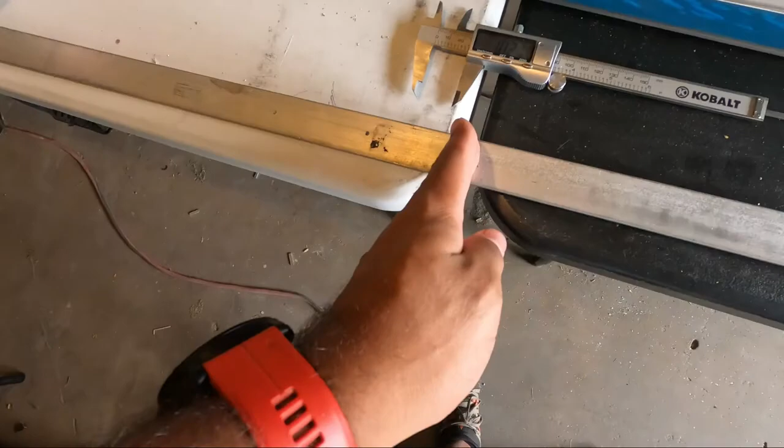The game plan for today is to use the extra spar cap strip where I messed up the drilling locations. I'm gonna cut it right here and use this portion as a rivet hole guide. Per the plans, rivets are 1.021 inches apart, so that's gonna look something like that down the whole length.

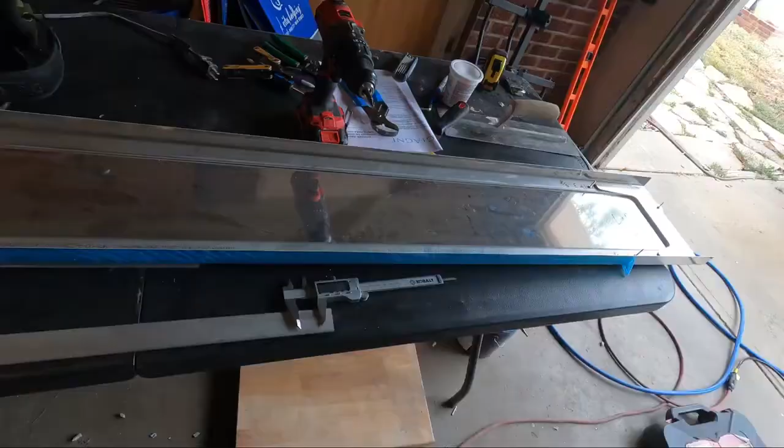So I'm gonna mark those, drill them, then start marking where they are on the actual spar, center punching, and drilling. I need to make sure not to drill the aileron and flap hinge locations per the plans. First things first is to mark all the rivet locations, so I'm gonna measure the center point of the cap strip.

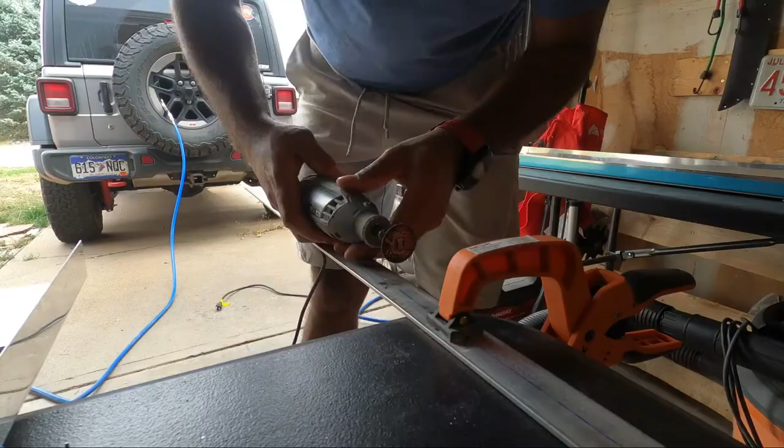I'm gonna cut off the excess right here, and I might find a use for this later down the line. Center punch, drill, and we'll see if everything lines up with this attachment and the center point over there.

Okay, I'm gonna drill 1/8 inch holes along this guide that I made. The final plans call for the holes that will have to get drilled eventually into the spar cap and spar web to be number 21 size holes, which is a number 21 drill bit, coming out to 0.1590 inches. So I'll have to go get some of those before I do the final drills, but I can start with 1/8 and resize to the larger size when I'm ready.

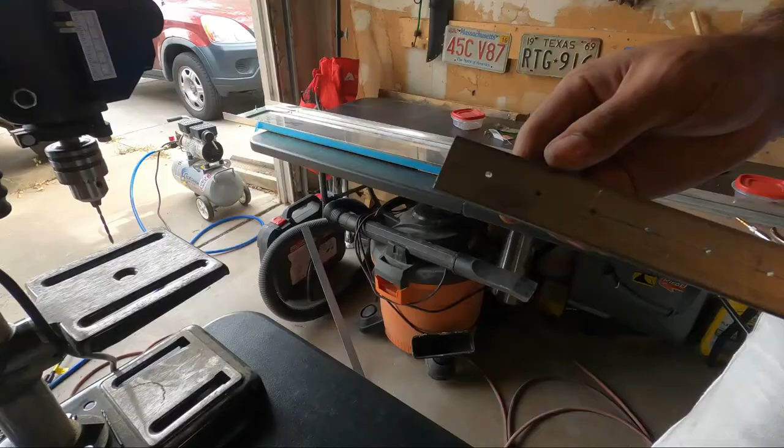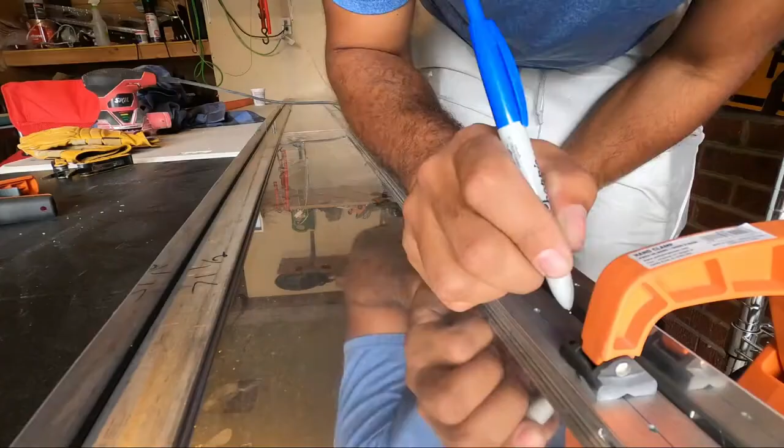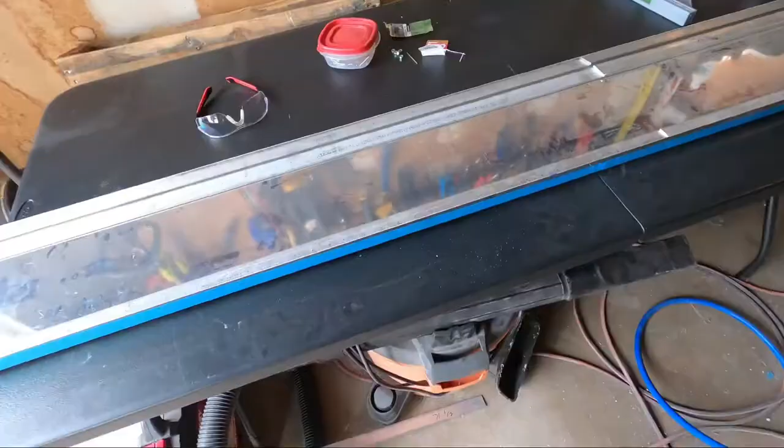Guide is made, let's see if it lines up. So I went ahead and marked all the rivet locations off camera because it's a little boring. Okay, station A flap, station B flap, station C flap, station D aileron, and station E aileron. Same thing on the left wing.

Hold the camera straight. I broke down and bought myself a rivet fan. So let's see if I can do this one-handed.

So this is 20 holes, and it can evenly space out all the holes I need to make, at least 20 at a time. Right now it's in its lowest, most compressed form. This is 3/4 inch spacing, this is 1 inch spacing, 1 1/4, and 1 1/2.

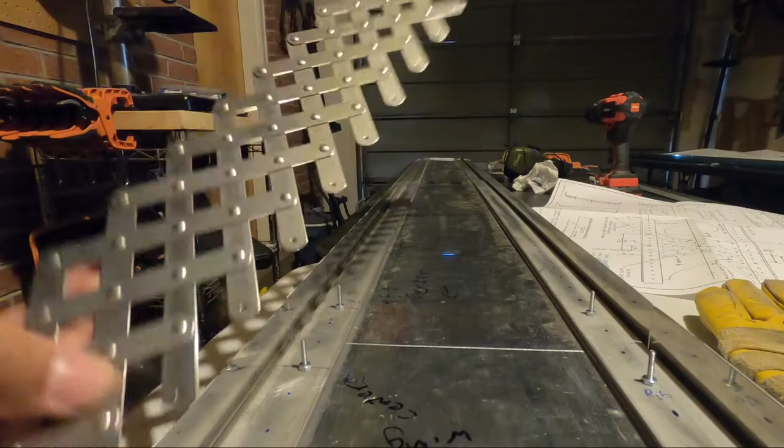So I'm gonna redo all these markings with this, which means I have to get rid of the original markings. I'm just gonna use a really fine sandpaper to do so. Then I'll mark them again, and we'll be ready to start center punching and drilling.

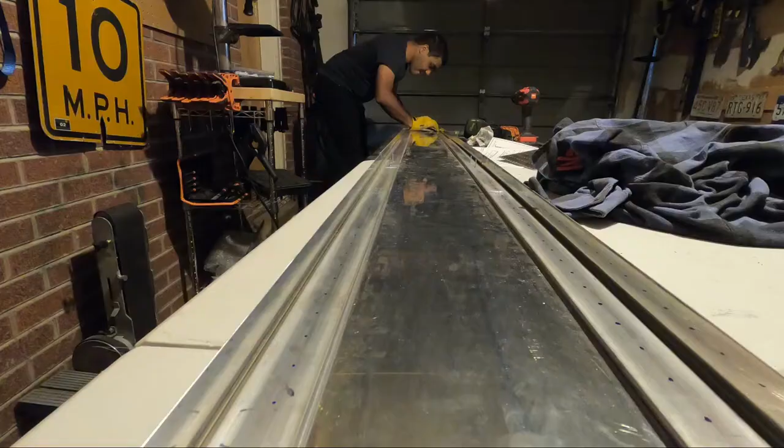In order to get the spacing for my spar correct, I'm using the full-size plans 7B. I'm going to line up these holes with that spacing.

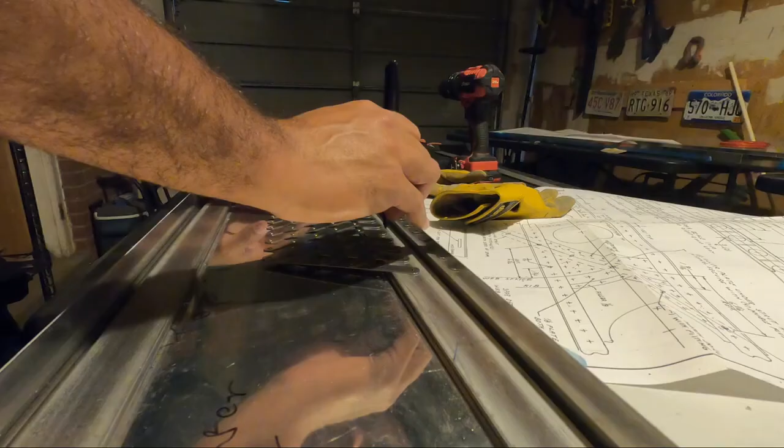Oh my goodness, so much better. So much better. They line up vertically. At the stations, they line up. That's huge. Now for the next swing.

Boom, marked, and this time it's actually accurate. Alright, start drilling. Drilling, I'm hungry. I'm gonna start drilling on Wednesday.

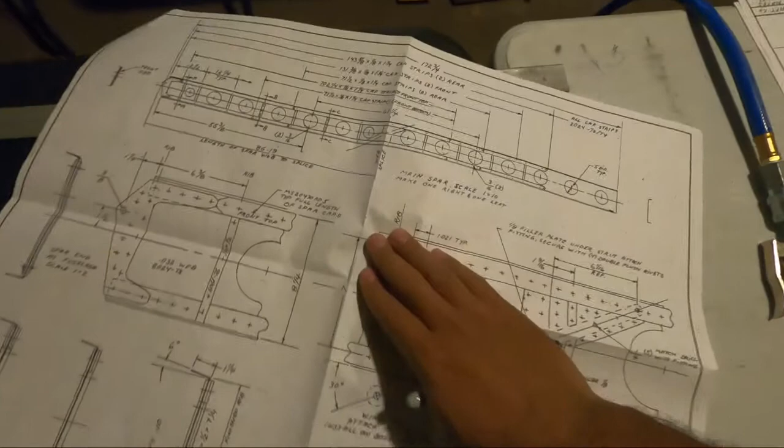Before we get started on drilling the rivet locations, I'm going to mark, or at least attempt to mark, where the ribs are supposed to go. It's a little difficult to make out from the plans. Let's see if I zoom in. These are spacers, right? It doesn't call out the ribs, unless those are the ribs.

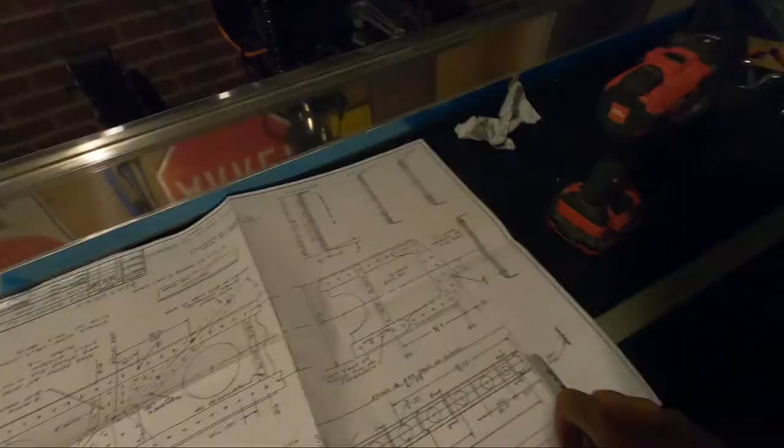1, 2, 3, 4, 5, 6, 7, 8, 9, 10, 11, 12, 13, 14, 15, 16. Okay, it's pretty much every space.

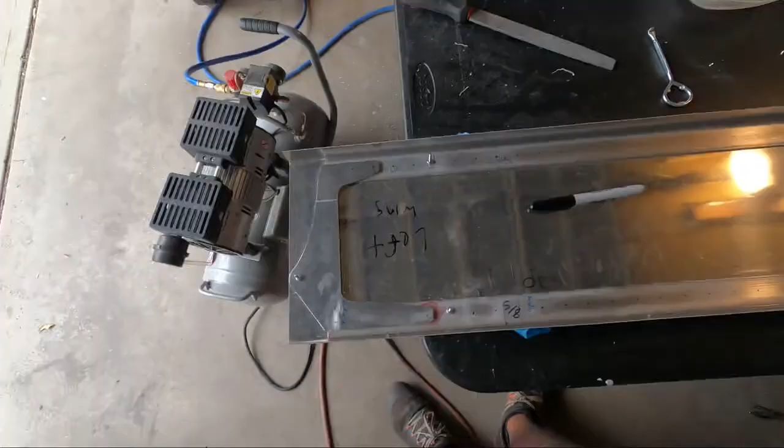Well, that was my epiphany on camera. Everywhere there's pretty much a spacer, there is a nose rib. I'll mark it. All right, rib, I'll mark a rib here. 0.032.

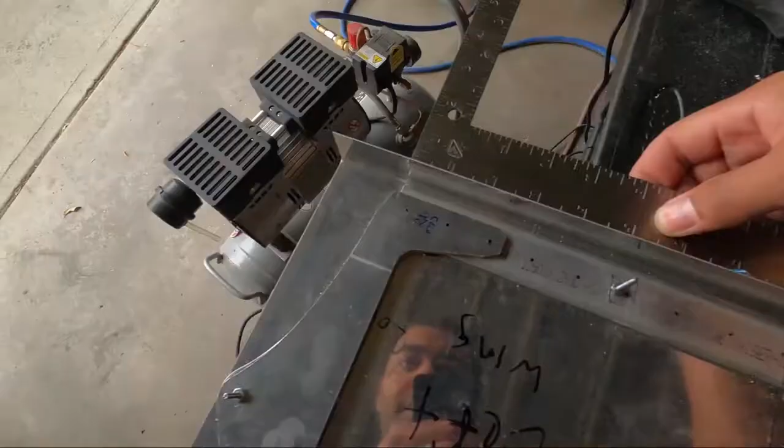Let's see. Rib. Rib.

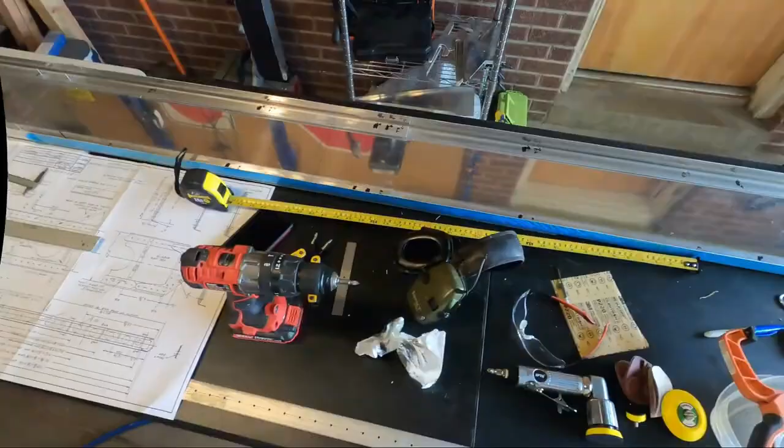Messed up measuring 3 times. I don't know why. I thought plans call for 12 1/4 inches between the ribs, starting after the third rib. So 1, 2, 3, and then 12 1/4. For some reason I measured it wrong, but it's all even now, it all lines up.

Rib locations. We're gonna center punch and drill. But first I need to feed my dog. This time we're gonna start on the right wing, because I did my first things on the left wing.

Center punch just broke, the C-clip on here just broke off. So alright, we're gonna have to pause on the center punching because my handheld center punches aren't really working, and that is what's left of the auto punch.

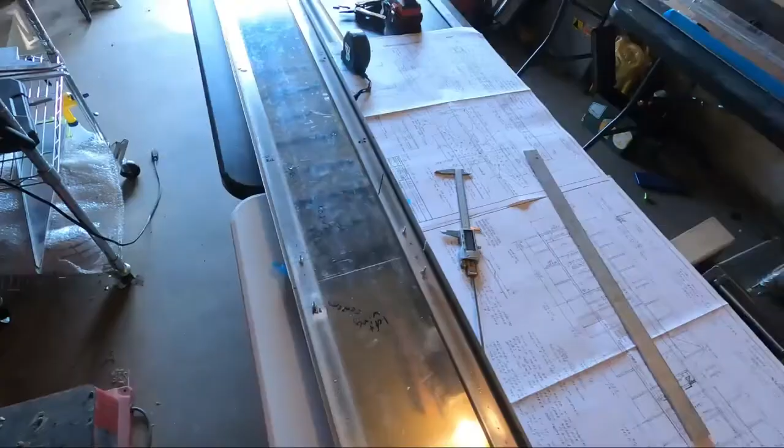Cap strip holes have been center punched. Let's check the plan, see what's next.

Now it's time to drill 1/8 inch holes for the cap strips. I'm going to level this up on top of the table so that it's in line with my drill press, and I'll start sliding it along as I get through each hole.

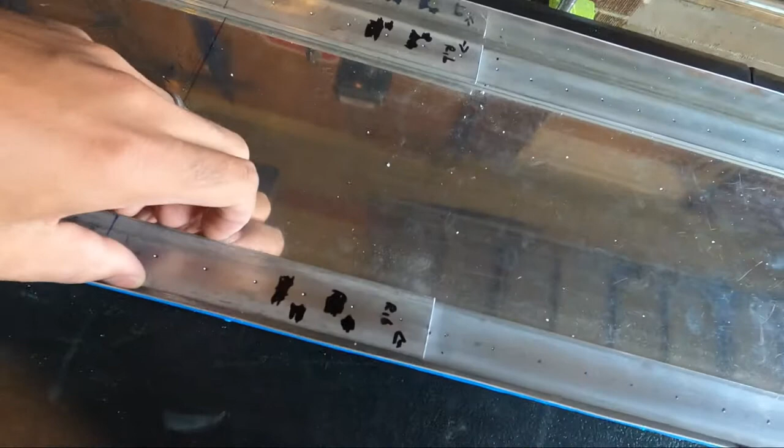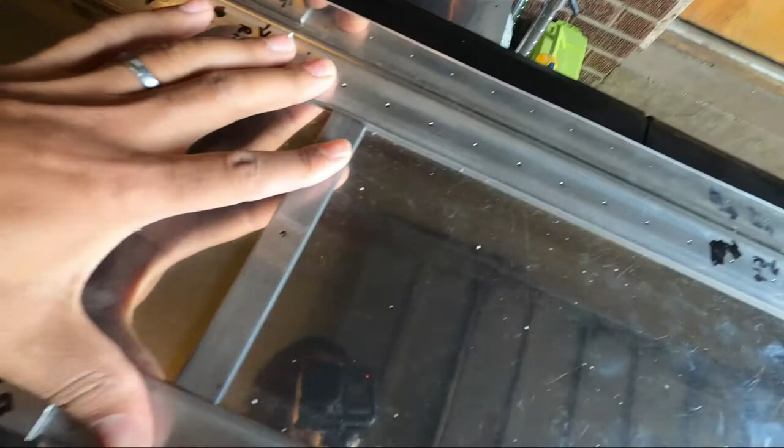I'm also going to clamp these in place. There's a little bit of wiggle room right here, so I need to make sure that the gap is consistent between the two. This is my guide, and we'll make sure that it's evenly spaced along the center line.

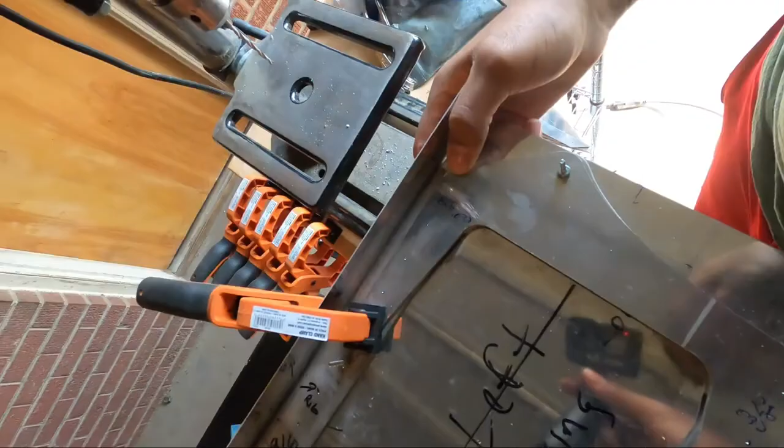First hole, boom. I'm gonna secure these areas with more of these nuts, because the clecos aren't long enough for that amount of metal, going through almost 3/4 of an inch of aluminum. Clecos aren't gonna cut it.

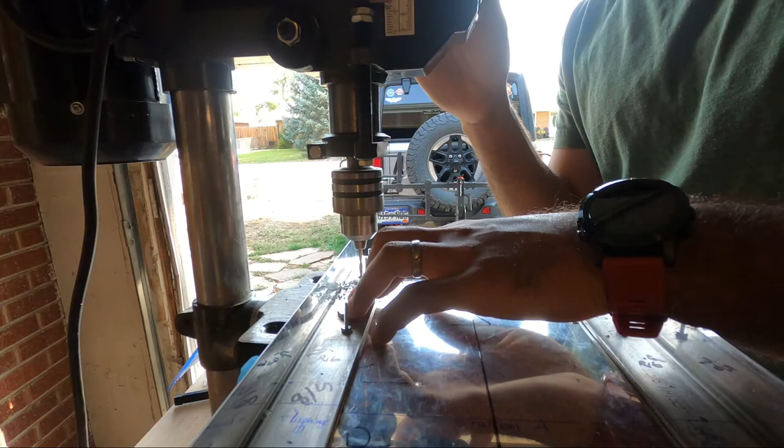Before I do any more, I'm going to do some center spots and clamp everything together.

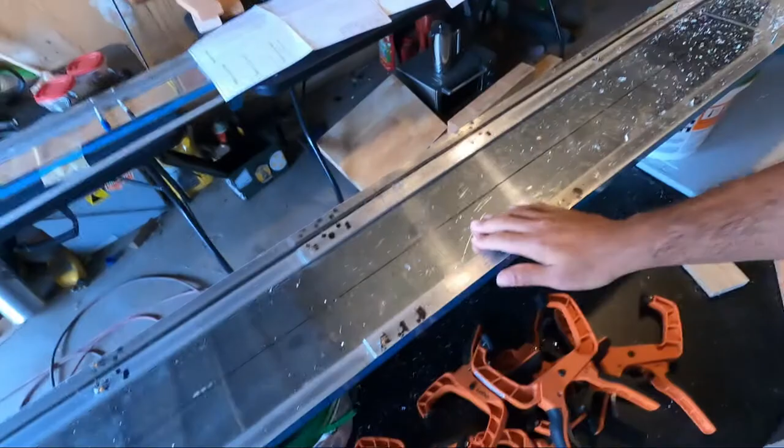I'm going to move the left spar off to the side and start working on the right. This will be my drilling table for now, it's easier with the extension cord to put it here. We'll get to town on the right wing after I do a little cleaning.

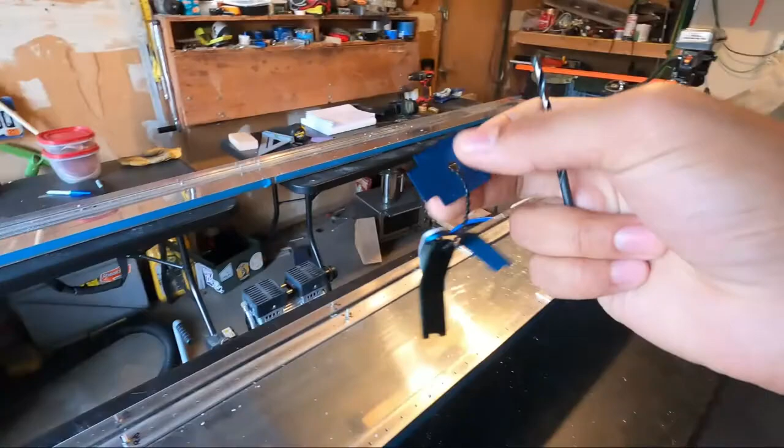for a -5 rivet. The designation of which is MS 20470-AD5, as in Alpha Delta 5. Each one of those rivets vary in length depending on how many cap strips are layered up on top of each other. I actually just got this, which is a rivet space guide. My rivet, before being set, needs to line up with that bottom left-hand corner.

Right now I'm going to drill the number 21 size holes so that we can prep for that.

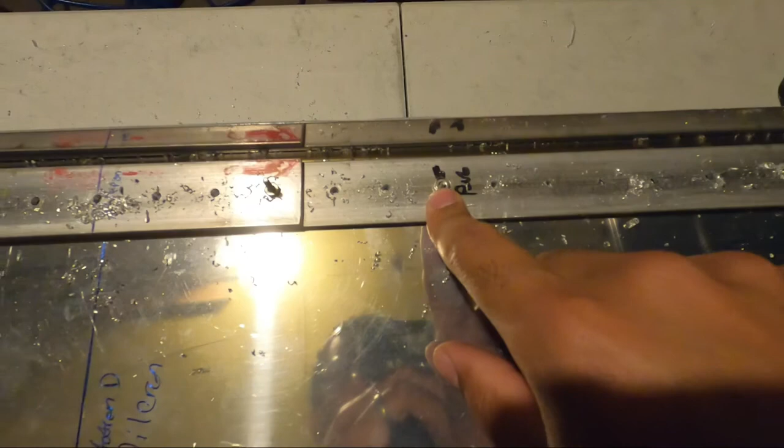Going to start drilling the rib locations. We're holding everything together, so these have all been drilled to the number 21 size. The others are still at 1/8, so I'll do these one at a time.

Now time to repeat that whole process on the other wing, but I'll spare you guys that. Oh boy, I'm tired. All the holes on both sides are drilled to the number 21 hole size for the rivets that I need, the MS-20470-AD5, or whatever the code is.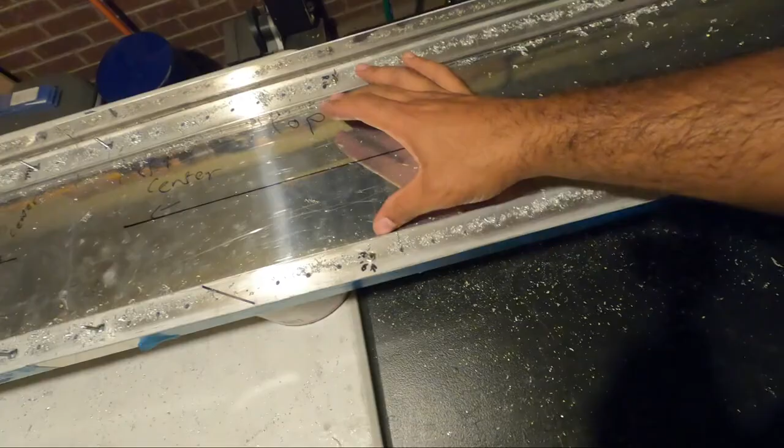I need to look at the manual and see what steps are next. I need to make some of the rib stiffeners. For the ribs, there are these little angled pieces that go in between the lightning holes. I need to make those, and I need to make the spacer bars that fit in between this and drill those. So I'll probably break that up into a couple of videos.